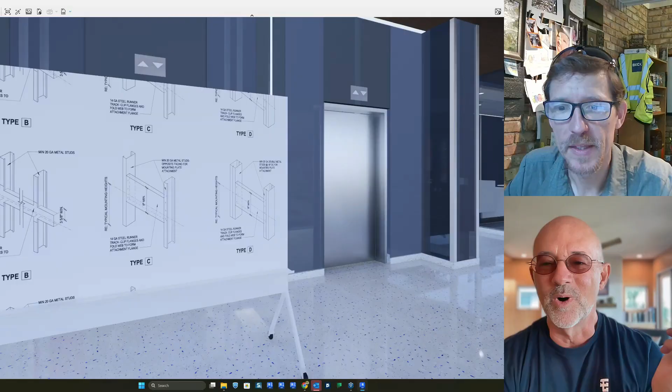So right away, and we didn't plan for this, I just happened to notice it while you're chatting - you have a whiteboard right inside the lobby. I don't think that's part of the actual project. You're doing something else.

So you asked a different question and I didn't really answer it yet. What we've been trying to do is come up with different ways to extend the life of our models and provide construction information in a way that's easy to communicate. A few releases ago, Enscape let us show the filters from Revit in Enscape.

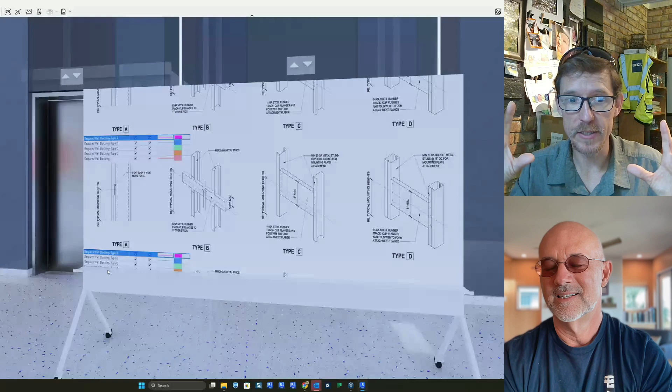And that was a game changer for us. A light bulb went off, and my coworker Mason, who does VDC, was like, there's so many things we can do. We show these plans where we highlight all the furniture that needs to be hardwired with neon green using a conditional format. And they're like, that's cool, but it's still 2D. What if I could walk around into a room and see that stuff visually? And now we can. That's why we're using Enscape.

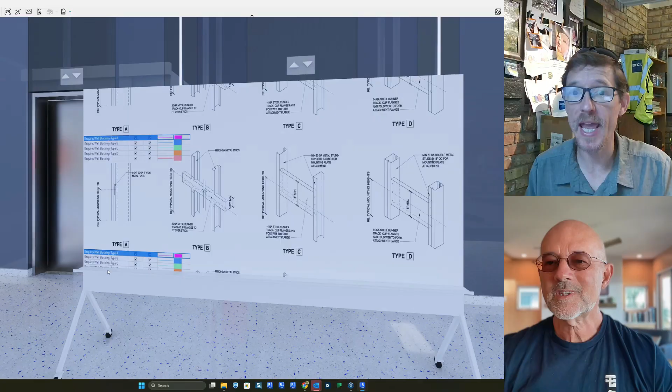In the last few weeks, I've been looking at where we have some problems, where we should start, what would be the first level. So we started blocking. We've got this checkbox in Revit that a lot of times our construction folks don't even know the information we have that we could give them. Every object in our model has this little checkbox that says 'requires wall blocking.'

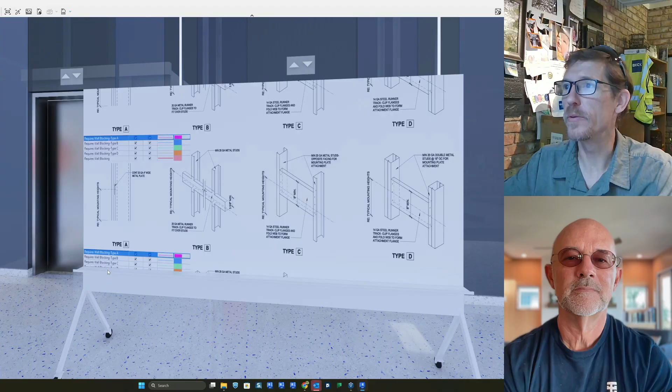So what do we do? We make a filter in Revit that says requires wall blocking. Well, what kind of blocking? I don't really know as an architect which one. There's these canned details that somebody hopefully knows are the right details to use. So I said, well, let's just put filters in.

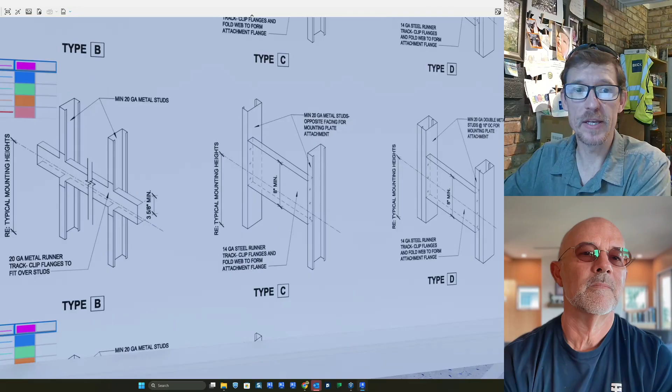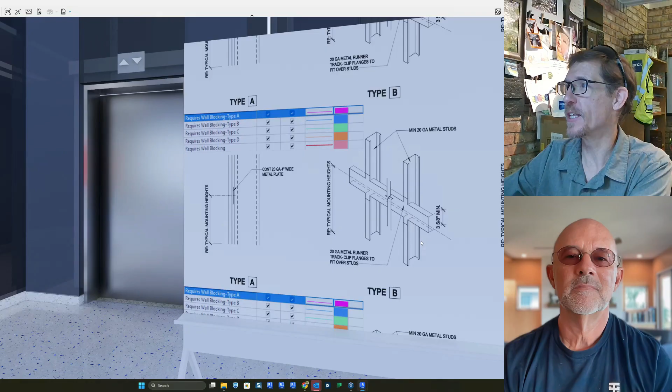So this is the filter snapshot, and I put this little A, B, C, and D. So the contractor can come in and be like, okay, A is the typical little strap, not great - you just put a little strap of metal in and can screw your cabinets into it. B is a little bit trickier, you've got to cut some studs and put that little thing in, and it probably holds a certain amount of weight. Then you get the big dog with a 6-inch one, and then a really big one. I don't know what the difference is between those.

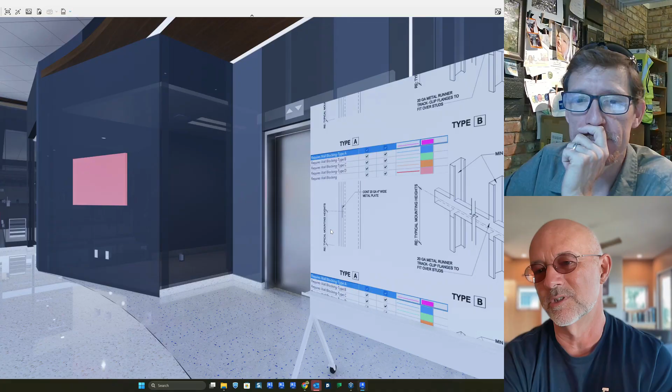Back-to-back studs, right. And then the one that's not here that you sometimes need is like a piece of wood that costs money. As we walk around - but the thing is, I think the word is skeuomorphic. It means a visual representation of something in the virtual space that represents how we would do it in the physical, analog space. So you put a whiteboard in the lobby because that's where you need to see it.

Yeah, and so it's not like a thing just floating in space, it's a detail - like, oh, there's a whiteboard that explains something, and you don't have to look away, it's already right there. But this is a workaround, because what I'd love to be able to do is pick on that TV and have it show red, so I know it needs blocking.

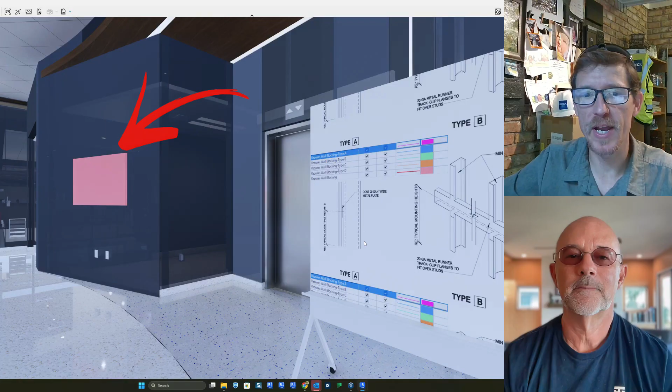So I stopped in the lobby, I know that needs blocking. But as I wander away, we're going to get to another room and be like, oh well, I can't bring my whiteboard with me. So that's kind of a problem. Okay, I remember that's red, so that's good, then I'll go find a room with something else.

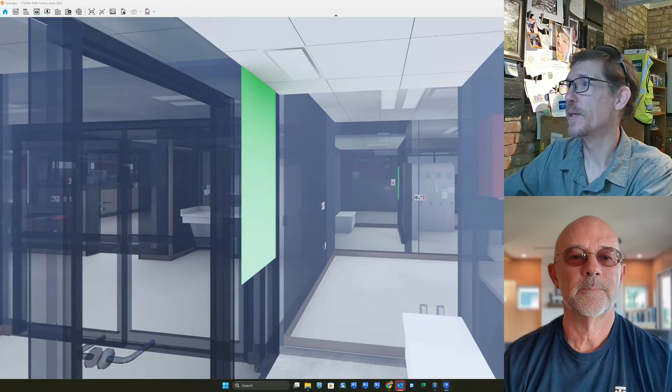We got to talk about why your walls are transparent too - that's interesting. So why did we do the walls transparent? I turned off the link model, but the reason is so all the pipes and everything else - if I turn on the MEP model, they'll show up through the walls and I can know if something that requires blocking has pipes behind it. It's just visual coordination, exactly.

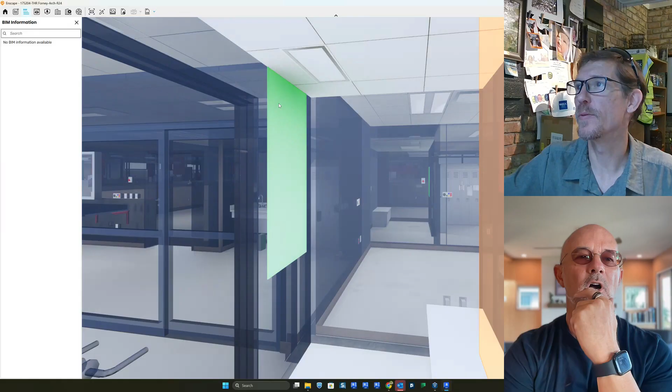Without - okay, so this is the thing that, when the BIM information tool was created, the intent was we would have a way of marking things up for coordination.

I don't know that it's used that much because if you're in a meeting and you have to pick something, put a push pin, and type a comment, for me it's so unnerving to be typing during a meeting. It just feels like every key press is a minute long.

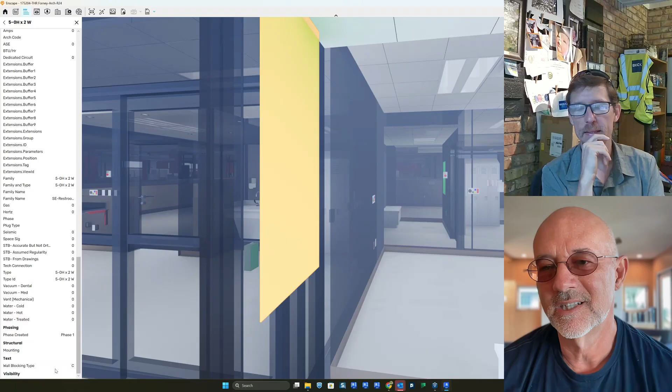But what you're doing is using the BIM tool to select things and read all the parameter information, and you create a lot of custom parameters. When we were chatting, I asked if custom parameters show up, and you said yes. So what have you got here? You can see wall blocking type C is here, it's in the data, but I've got to go back to the legend to find out what C is.

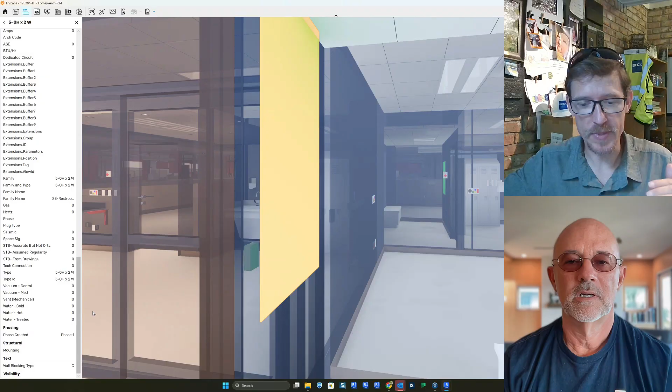So that's true, or I have my set of drawings and I flip to that. I was just watching a deep dive yesterday on Chaos's construction, their Chaos Cloud. I guess beta is a streaming version of this.

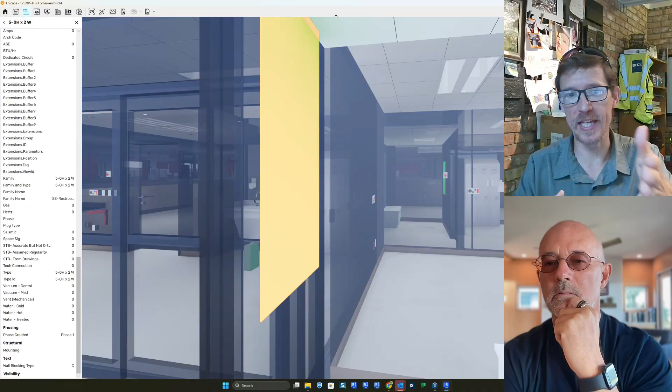And that'll be huge, because right now we have two problems. We package this thing up and get the executable, which is like 700 megabytes for this building, and it takes a while to build. And if, like in this case, I didn't load the MEP model and I've already made changes, I'm like, crud, I need to redo it, reload the MEP model, and re-export the thing.

So that's exciting, and they have this thing where they can pop up information. Like if I put my pointer over this, what can I see? I would love to be able to specify what do I see.

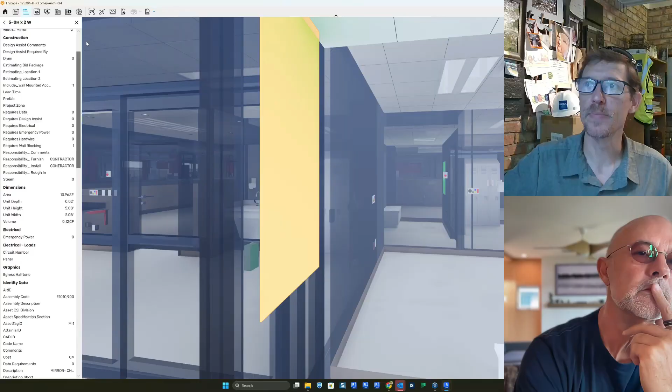Because the problem with this BIM information right now is it's not curated. I still want to make it easier for whoever is consuming this information. Right now I don't know why Enscape decides to show me what it decides to show me, it's this massive list of probably every parameter. You can't curate it, you can't cull it down and say just show me elements of a certain category.

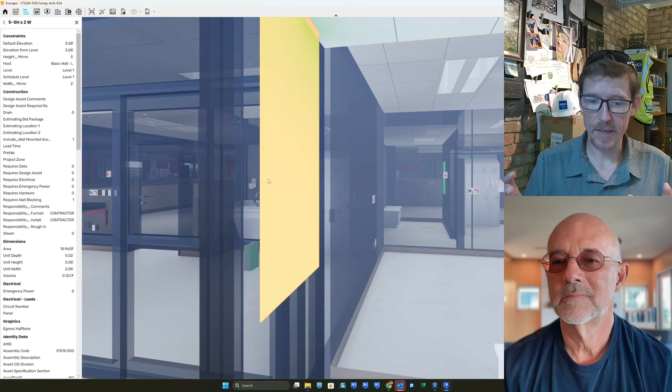And this has always been an issue in ACC and all of them. So what I'd love to do is, Enscape is so close to being able to, if I could have a 3D tag, create like an element tag, so if I put this over, my tag would pop up and say it's Bobrick mirror, whatever, and it requires blocking C. And you don't need the tag to show all the time, you'd prefer it appear based on requirement.

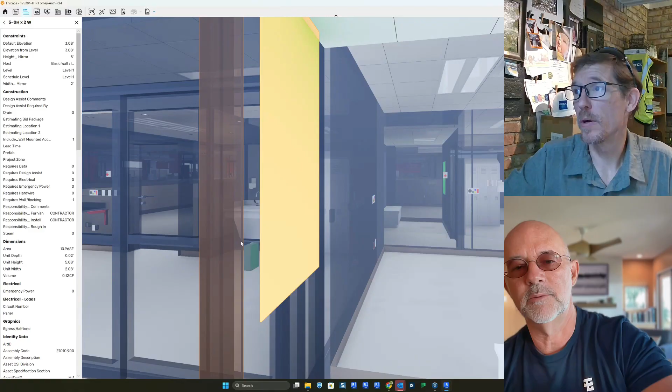So that element you've selected needs wall blocking C, and over to the right a little bit, looks like there's some casework in the next room that's a different color because it's using a different blocking. Exactly, yeah.

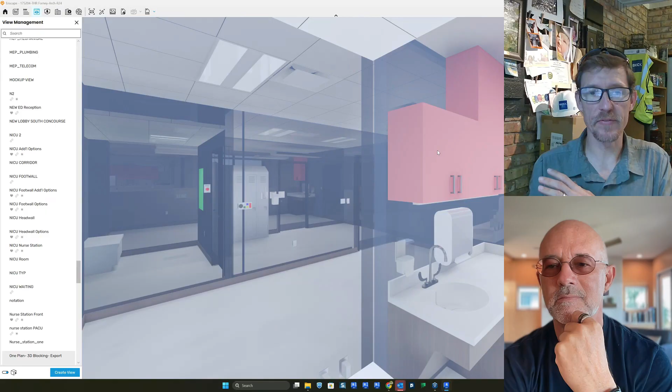Anyway, this is hugely helpful, but it's not enough information yet. At the end of the day, the other thing is, this is one filter set. What I really want is to have the Revit filters I've preset in Revit be available for the end consumer right here, and be able to say, okay, I'm seeing my blocking filter now, but I need to switch to the electrical one, or see which walls are going up to deck. What would be the next thing I'd want to see in this room?

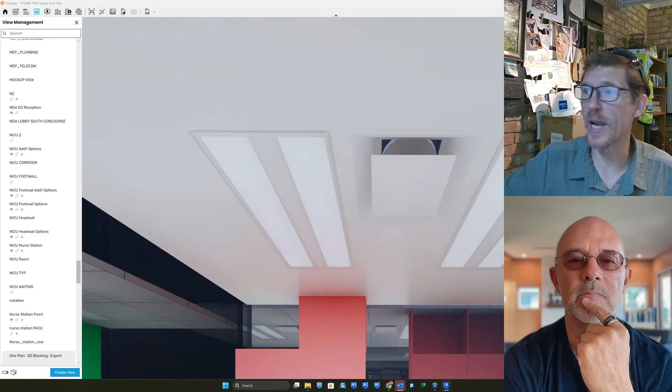Oh, maybe I need to switch, we're now painting this room and I want to turn off this filter and see the final. I'm with the painter saying, hey, these are the colors on these rooms, and I want to turn this filter off. Yeah, you can't do that in the exe file, it's kind of frozen. So the ability to do that live.

But the thing is, you're having this concurrent to the design file, which shows me Enscape is not just a rendering tool, it's kind of an understanding tool, an easy way to walk around and figure things out. If you don't know what something is, you can pick it in Enscape and it'll display all the parameter data. Sometimes I want to render and see things in an emotional, gratifying state, and other times I want to see them and understand what they are more analytically. And you guys are doing both.

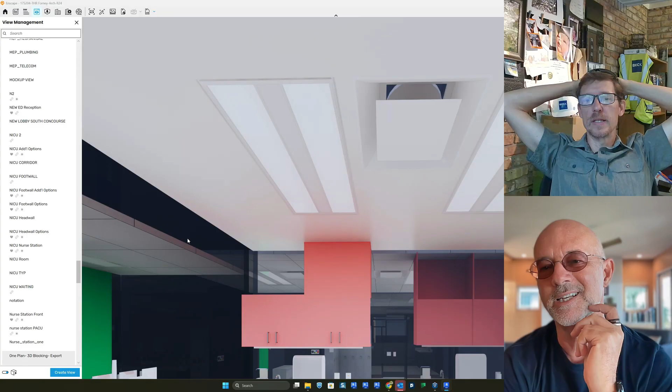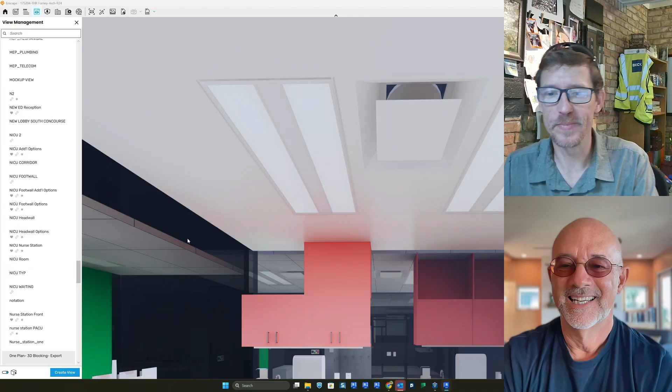Yeah, and that's, I guess, when you said I push stuff, it's true. I've got this tool, I understand it, I have Revit and I understand it, so I want to see how far I can take that tool. Certainly there are other tools, but you just get too many and it's like my head explodes. So maybe that's being stuck in a box. And no.

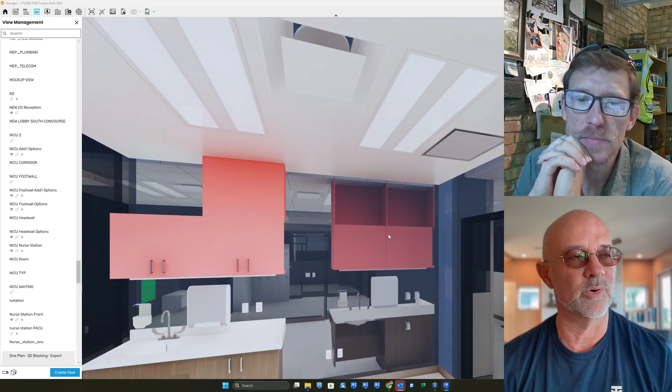I think there's an artifact where people have the tendency to do something difficult in an easy tool, rather than do something easy in a difficult tool. Your entry to an easy tool isn't heavy lifting, it's easy, so once you're in there you ask how far can we push it. That's easier than learning a complicated tool first and then deciding if the workflow works. People want to do the easy thing and figure out how to do something hard in it.

Anything else interesting? Your walls are translucent, so as you said, if you had the MEP model loaded, you could see if there's any visual coordination issues.

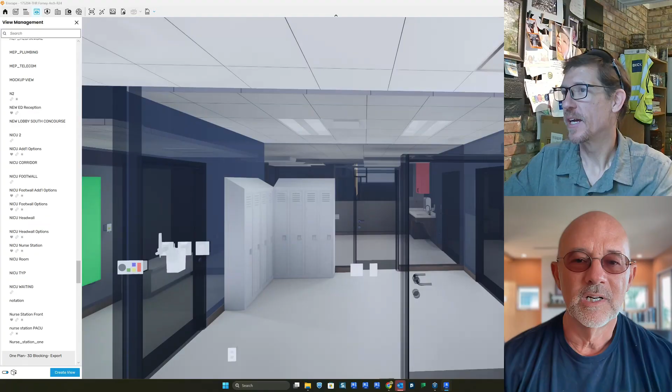I don't know that in this example there's anything interesting, except it was really cool. It looks like you're going through a lot of effort just to show what switches do on the walls. They're not just panels that float in space, they've actually got detail—like that looks like an emergency door release or some kind of red button, the one that's alone.

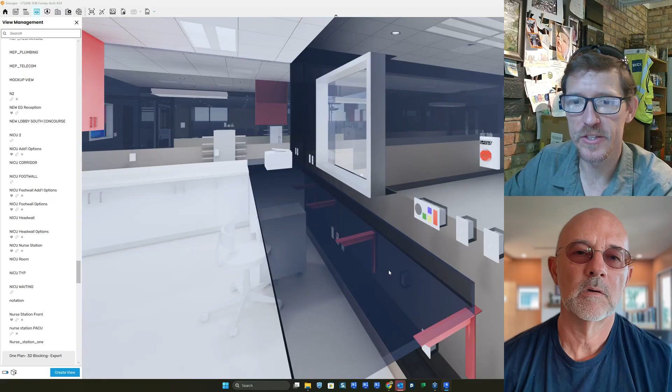In healthcare projects we do have to locate everything, so this is really helpful. These casework brackets are a huge thing—I doubt most people put them in, or they just use a standard detail that says do these every two feet. But they really need to be coordinated because they need to support a big counter and interact with outlets.

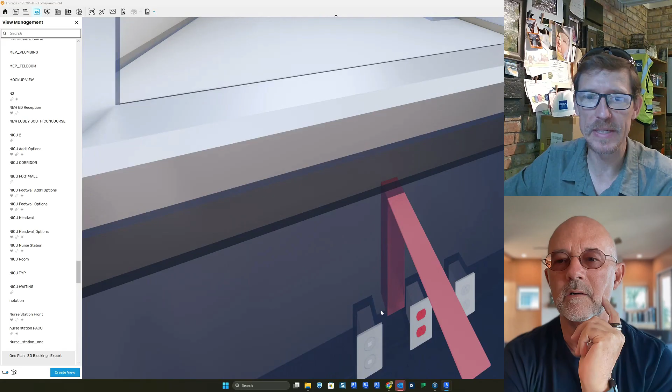So you can see these outlets here—is that going to work, that you can have them right on either side? Probably okay, but it might be a problem, and construction might say don't do that, move three of those to one side of the bracket. I don't know, it's probably okay, but maybe it isn't.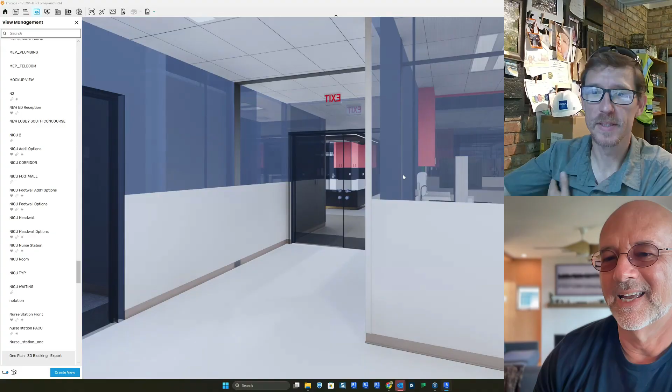Now, as much as we're talking about analytic information here, you do go to a very fine level of detail resolving paint finishes. You do that in Enscape, but you display the information on drawings, which I thought was interesting, because the drawing is the sort of artifact of how we're trying to understand the building.

So I think you and I have talked about this before, but is this your actual working floor plan documentation if you were to print this on paper? Yeah. Or this is what they would see in the job trailer. Yeah.

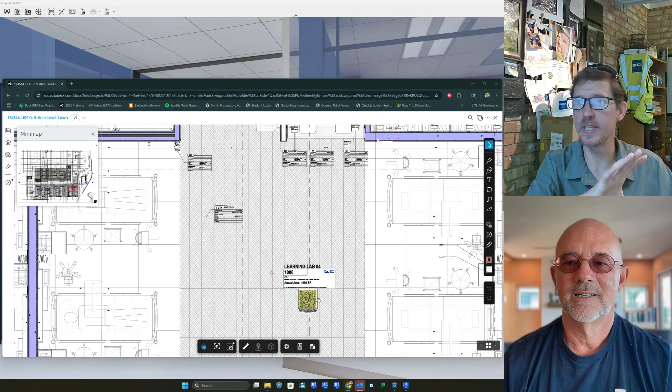So we do a couple different things. We still have these 30 by 42 sheets of paper. This is a working view we call 'one plan to rule them all,' which is large scale. But we'll put this same QR code on our typical enlarged plan that has the enlarged plan of the room, the ceiling plan, and some interior elevations. We'll add these QR codes.

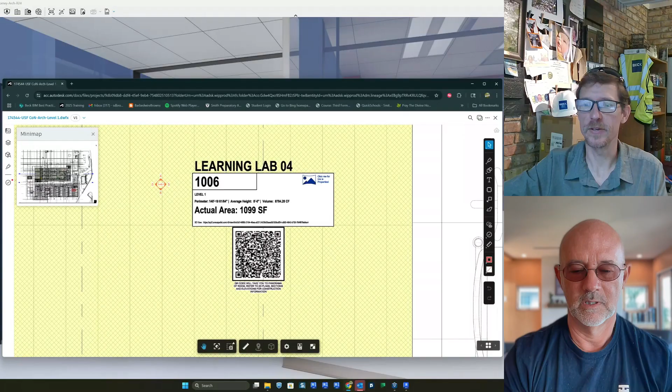Can I scan that? You can scan that, yeah. And then you could share your screen and see what you get. Let's see if it—it says Enscape3D.com, it prompted me to open up a view. Are you able to share your phone? Because I can get to it. No, it's working—so in the presentation somebody should be able to scan this and then navigate the room.

I'm seeing casework on the wall. I can see what looks like small disposable units. A lot of the furniture, the beds, are all just white context, but they're very detailed. Then you've got tile on the wall, and it looks like some impervious finish on the floor. Yeah, and then white paint and casework. There you go, that's it.

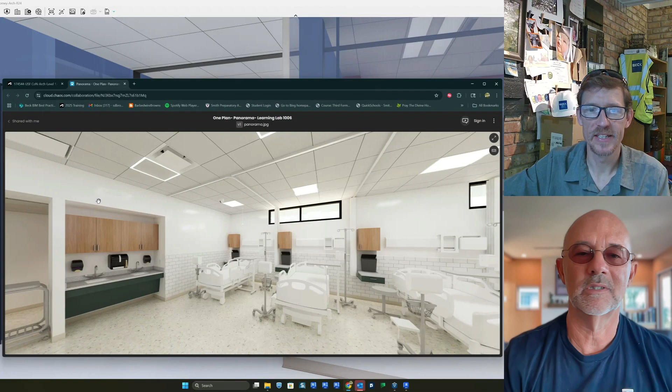So you're putting these QR codes on our plans, right there. It's crazy that we show the owner the final rendered view, and we take a lot of time at Beck to have our interior designers pick out the actual materials, right?

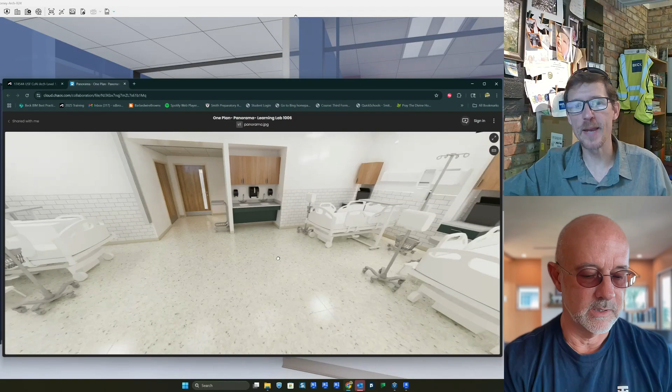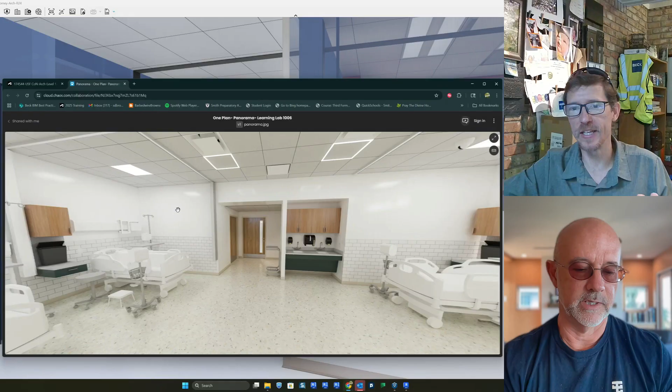And we render them, and they want to see what the real thing is. And then we don't let the painter or the mill worker see what it's supposed to look like at the end. My holy grail is that I could put my cursor over this finished render and it would say this is Sherwin-Williams paint, XYZ, and the contact info. I want to highlight over it, because I know Enscape's pulling that material, it can pull the image asset out. So could it pull out all of the parameters we've already put in our finish schedule, and reveal those to me, and let that stick there, so he can come back.

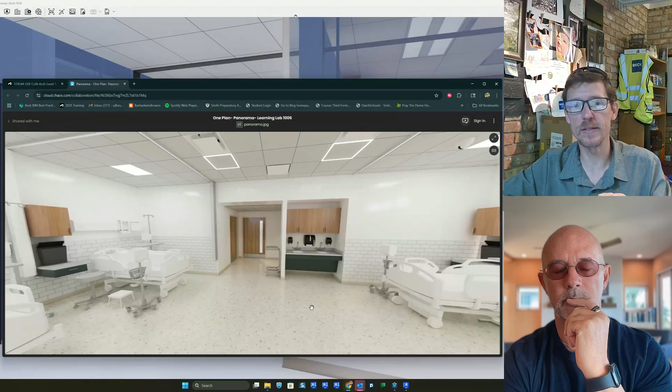Especially this room probably has a plastic laminate finish, a plastic laminate that looks like wood, paint finish, and this FRP, and something in the terrazzo floor. If all of those finishes, and that's the person consuming it, the painter, he could click on those, it gives him what the material is, and it sticks there for a little while. And then of course, if you could measure in this view, those things would be helpful to them too.

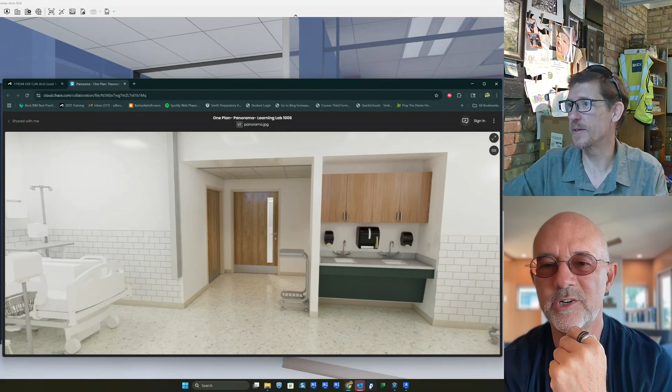So we're trying to pair this high level, highly detailed plan view with all that information with the graphical information. This is not a rendering to get an approval of a rendering. This is a rendering so people who are building the building understand where things go, even down to materials and finishes. Right, so they still have to then... let's see if this will stop doing weird stuff.

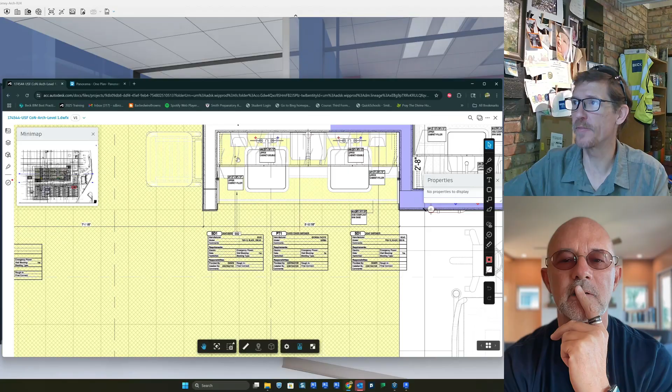I would love to curate this tag, so when they look at that 3D view at that soap dispenser or whatever it's pointing to, paper towel dispenser, that's the information they see, within the Enscape window. Georgia Pacific, doesn't require wall blocking, all of those pieces of information that you would have had to flip to a schedule to go find, just put it where you see it. Put it in its context, in the model. We know it's in the model, it's just what's the best way to give it to them.

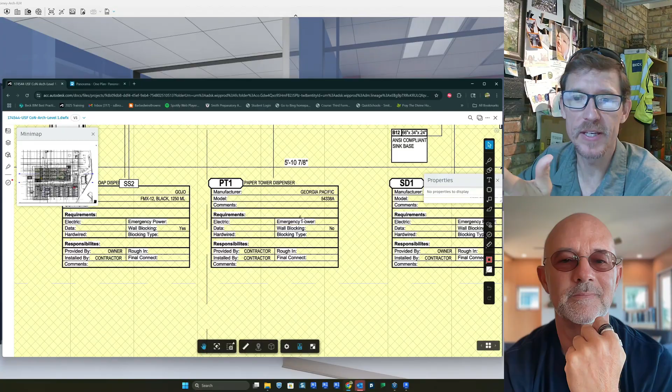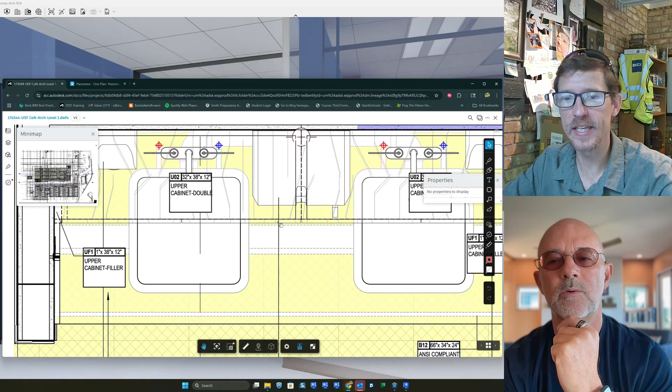Right, that they'll understand, because even this stuff's cryptic. I think it's clear in plan that this is a sink set to transparent and you can see a counter below that, and that dashed lines mean that's above, so there's cabinets above. But that might look like a bunch of gobbledygook to a paper towel dispenser installer. Giving them that drawing may not be helpful, but maybe you need both - you'd like to see it in first person mode, and you'd also like to see all this analytic stuff with things inside of things.

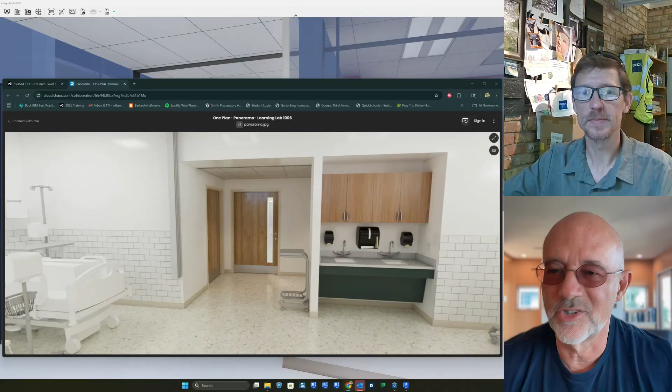Look, Scott, this is great, I really appreciate it. I mean, we've got a couple of examples of workflow, you've asked for future features, like here's how it would be useful if you guys could extend it. Let's do this again, we'll take a couple months and then we'll come back. All right, you'll have done something else then that gives me joy.

Well, our next thing we're working on is door hardware, which is one of those things that's no fun. But like I said, we need to figure out which doors. We need to graphically show doors that have card readers and which ones require electricity, because that's got to get roughed in. And if it doesn't get roughed in and everything's finished and then they come back and say no, we needed this door on power, it costs us a bunch of money to rip out drywall and run line. So it's crazy, these things, it's scope gap stuff. The architect's not really responsible for that, means and methods, and the contractor is responsible to put it in. But if we can show them where, every problem we prevent is at the end of the day a bigger bonus for everybody, a better building.

So you'll be lighting up those doors like you were lighting up wall mounted items. Yeah, I mean it's a simple graphical thing, right? If it's purple, it's got power, and anyway, something - you have to decide the colors. I don't know, you run out of colors, that's also a challenge.